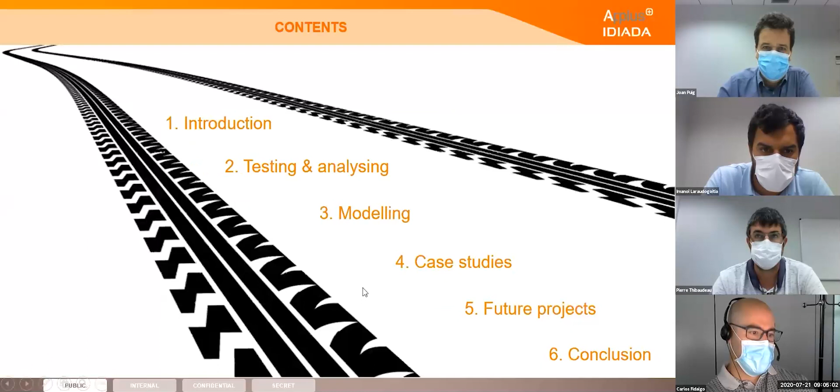At first, we would like to do a brief introduction of our company. As you may know, IDIADA is an engineering partner to the automotive industry, which provides complete solutions for product development around the world. Some of our main assets are the following: we are a team of more than 2,600 professionals with first-class state-of-the-art testing facilities, we have an international presence in more than 22 countries, and one of our strong points is the use of innovation in our services and technologies.

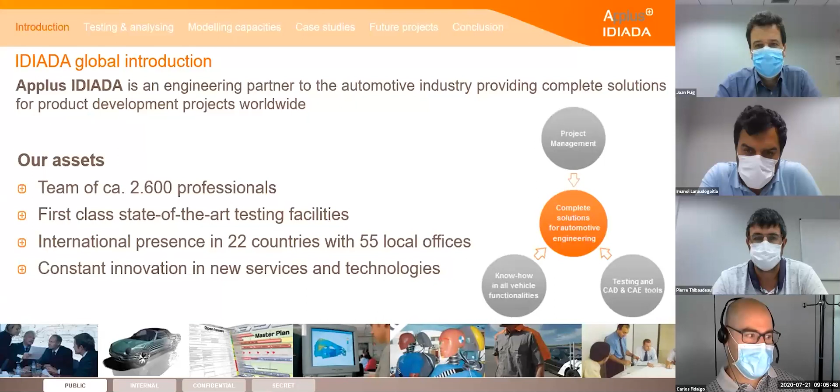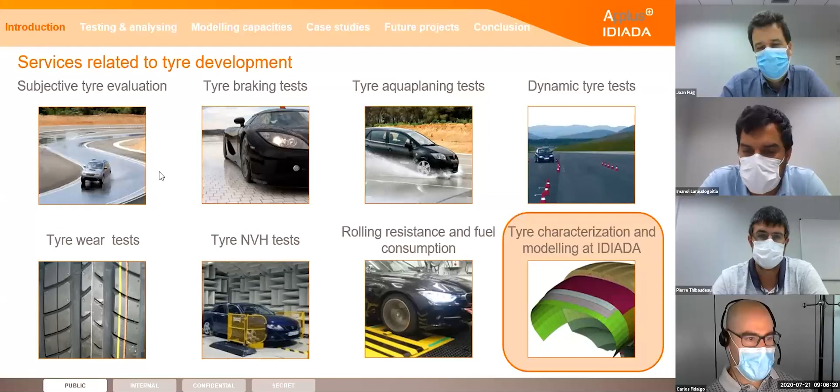In the following slide, you can see all our services related to tire development. As you can see, we have two kinds of services regarding tire. One focused on vehicle, such as subjective evaluation, braking test, aquaplaning test, dynamic test, durability test, NVH, and also rolling resistance and fuel consumption. And regarding just the component, which is what we will focus on today, we have tire characterization and modeling, which we perform in-house.

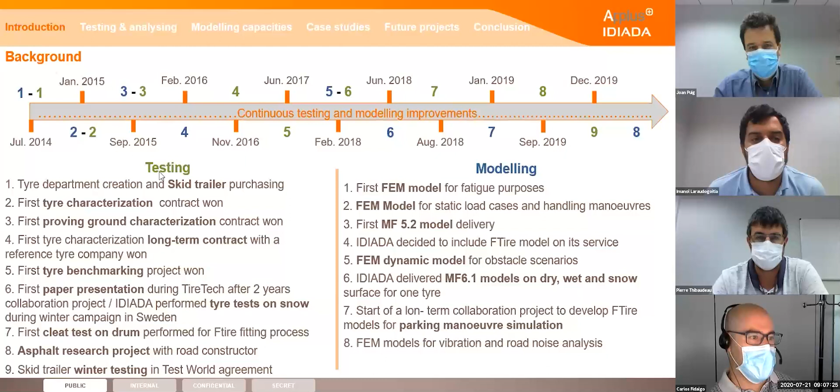In this slide, you can see our background since we started our tire product, or the evolution. Everything started with the purchase of the skid trailer. It was at this point when we decided to bet on real proving ground conditions for tire testing, because we think it's very important to test your vehicles on the same surface as you will test your component, so correlations might be easier than using laboratory testing to match your vehicle tests.

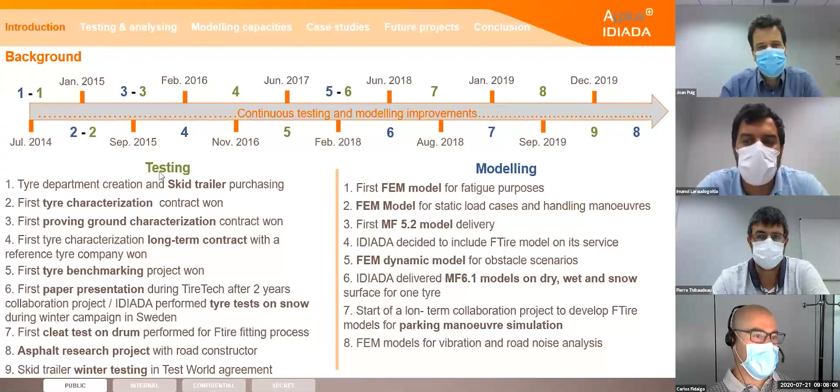From this point, we started winning different projects and developing different services until nowadays. But the most important thing of this slide is that you can see we are always improving our testing and modeling capacities every day. And now I will let you with my colleague Pierre, who will introduce our testing and analyzing capacities.

Thank you, Imanol. So as my colleague just said, IDIADA is a company which can offer you complete support during the development process for each part of a vehicle. But today we will focus on tire. In IDIADA's tire department, the first and main goal is to help our customer integrate the tire on its vehicle in the best way. For that, we are using several tools, which I will introduce now.

So the first of them is the skid trailer. This machine permits us to characterize the tire in dynamic conditions on a real proving ground. The tire is fixed to a hub at the center of the trailer and can be controlled in different ways: slip angle, camber angle, vertical load, etc., while all the forces and movements are recorded. Thanks to that, we can determine several characteristics of the tire, like the cornering stiffness, longitudinal and lateral maximum adherence.

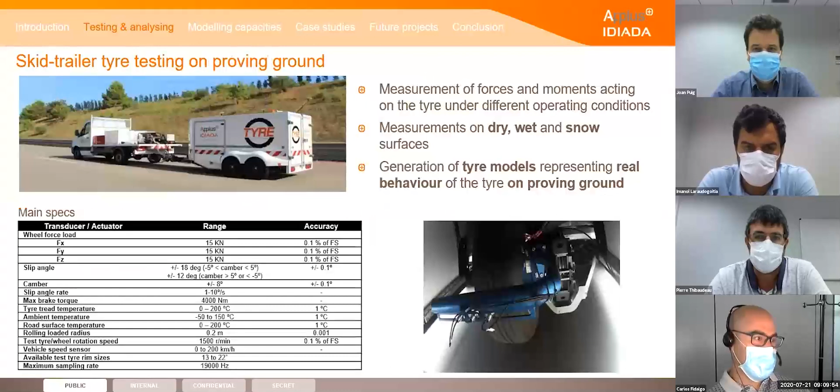One of the advantages of a trailer compared to a flat track is that we can move it to another place and perform the test wherever you want. For instance, two years ago, we made a snow campaign in Sweden to compare the characteristics of a tire on dry and wet conditions, tested at IDIADA proving ground, and on snow conditions, tested in Sweden.

The second one is the KC rig, which we have modified and adapted to use one of the platforms to test just tires. The machine allows us to characterize the tire in quasi-static conditions. The platform, shown in yellow in the picture, can be controlled on five different axes: X, Y, and Z displacement, and X and Z rotation, while the six forces and moments are recorded.

Thanks to that, we can determine the longitudinal, lateral, torsional, and vertical stiffnesses of the tire, but also perform complex tests like parking maneuvers. In this case, the surface used is 3M P120 sandpaper, but we can adapt to any specific customer requests. For instance, we are currently working internally on adapting a block of asphalt to have test conditions as real as possible.

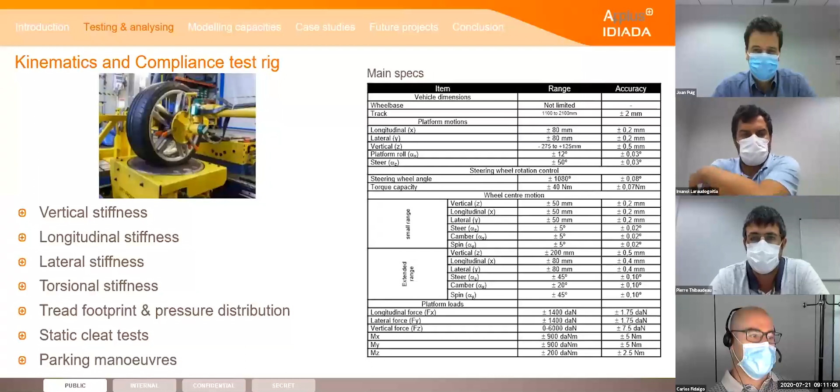Last but not least, the drum machine. As with the KC rig, we modified and adapted a drum made for rim testing in order to characterize tire frequency response. The tire rolls on a steel drum with a cleat, while the center of the rim is fixed. As with the other machine, all forces and moments are continuously recorded during the test.

Thanks to those tests, IDIADA can determine the frequency response of a tire to different excitations and different cleats. This rig allows us to make a big step forward in the modeling process, mostly for the FTire model, which is a physical model.

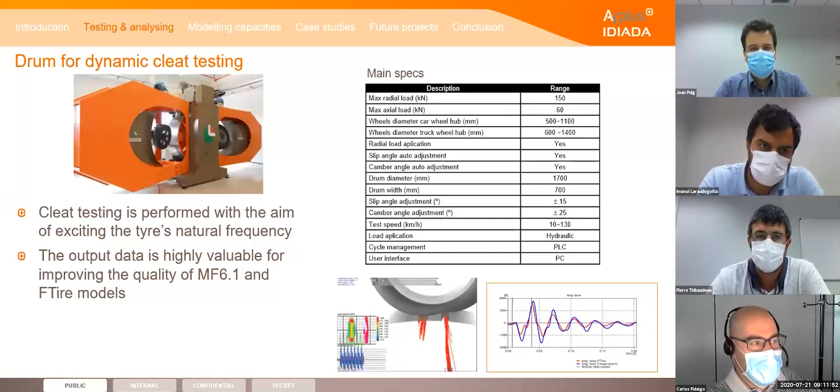In order to properly use those three rigs, IDIADA developed internally a set of test lists to characterize the tire as well as possible, considering its own temperature and wear, but also the climatic conditions. For that, each test list is adapted for each tire in order to perfectly match its behavior.

Moreover, IDIADA is open to any specific request and has the capacity to study updates to test rigs and test processes. For instance, last year a new test procedure was developed, modifying the control software on one of our rigs.

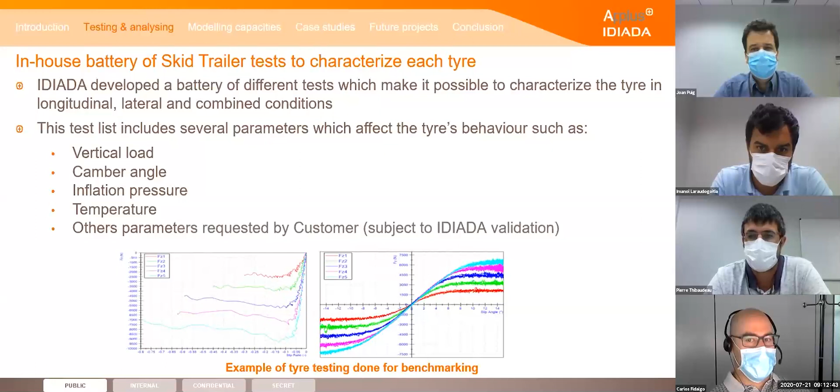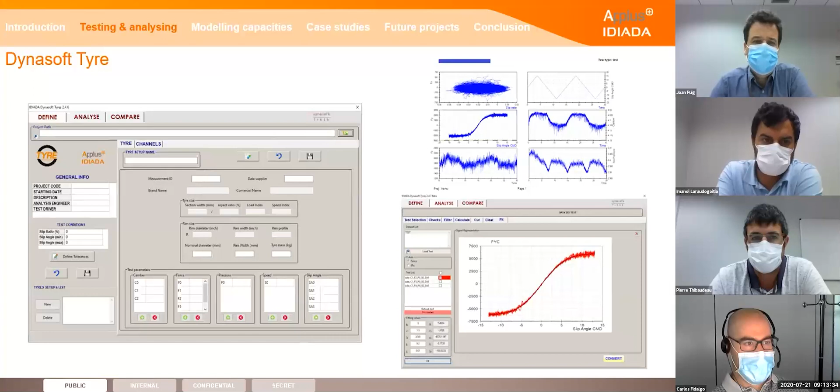But why are we performing such analysis? For example, to compare tires between them, or to reference one during a benchmarking project. For that, a set of different normalized metrics has been developed to characterize a tire in order to compare this data under controlled conditions.

These tools help customers a lot when they need to make the first choice of a tire or when they want to integrate them on their vehicle. It also helps tire manufacturers when they need to compare different prototypes to define the direction they need to follow for development.

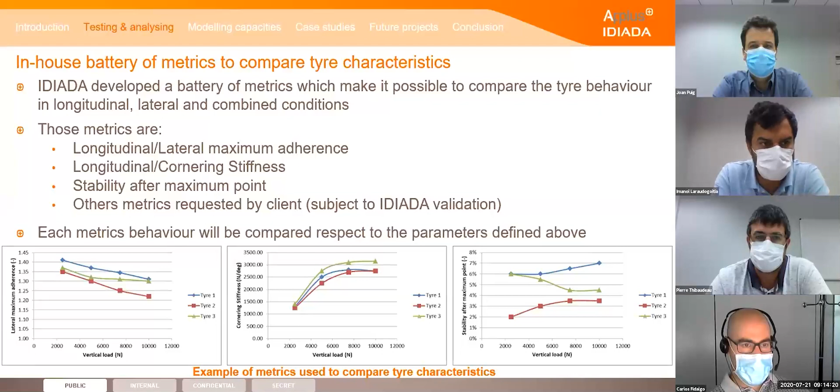So until now we've talked about tire characterization, but there is another interesting topic to deal with: proving ground characterization. As explained before, the skid trailer performs tire testing on a real proving ground. In this case, when using a reference tire, there is a possibility to characterize the proving ground by performing longitudinal tests based on different regulations.

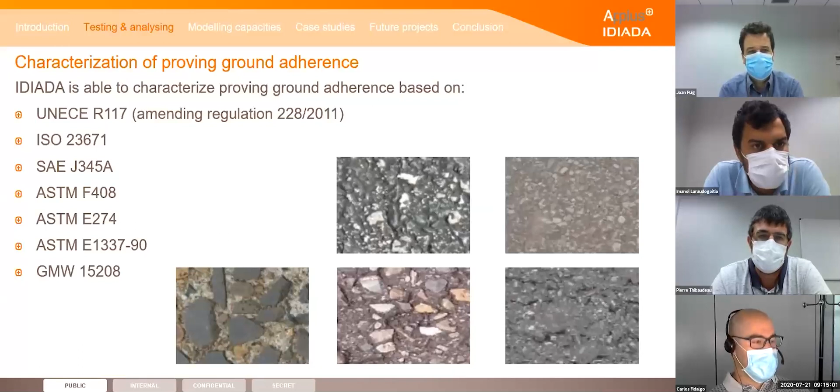As with all the other topics, IDIADA is used to working with some of these regulations, as you can see on this slide, but is open to studying new ones if the customer requests it.

To sum up a little, IDIADA has a wide range of testing and analyzing capacity, which is in a continuous improvement process based on investigation but also on customer requests. As explained in the last slide, all the tests and analysis done help the final user better understand the tire during vehicle integration or the prototype process, but that's not the only usage.

Based on all of this, models and virtual simulations can be done, and my colleagues Imanol and Carlos will explain a little more about that now.

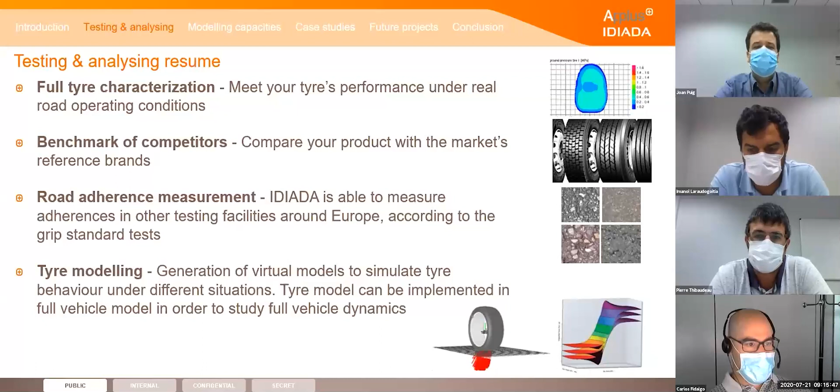As my colleague Pierre just introduced, we will go through our modeling capacities. We will start with magic formula models, which are mathematical models based on Pacejka equations. We perform different models, such as magic formula 5.2.

Magic formula 5.2 has two different use modes, use mode 4 and use mode 14, which includes the transient behavior of the tire. We are also able to build magic formula 6.1 models, which is the main model used by IDIADA.

We strongly recommend this model over the 5.2 because it has better things such as pressure behavior. This model includes 3 inflation pressures. The transient effect is also better, similar to the Swift model. And the camber description in this tire model is better than the 5.2 model.

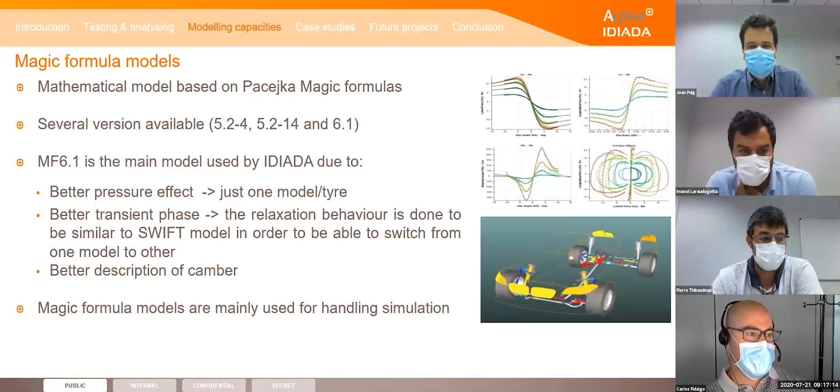All these models are mainly used in-house for handling simulations. These models are generating two different kinds of tests: tire dynamic test and tire quasi-static test.

Regarding dynamic test, we perform pure lateral test for studying lateral force and MZ torque. Regarding slip angle, we also perform pure longitudinal test, which focuses on longitudinal force versus slip ratio.

The last dynamic test we perform is a combined test, which is a mixture of lateral and longitudinal test. So while the tire is rolling with slip angle, we perform some braking tests to see how the tire is behaving in different conditions.

Regarding quasi-static test, we perform tire stiffness tests such as vertical, lateral, and longitudinal test, and we also include some footprint tests for Magic Formula 6.1 for the transient behavior.

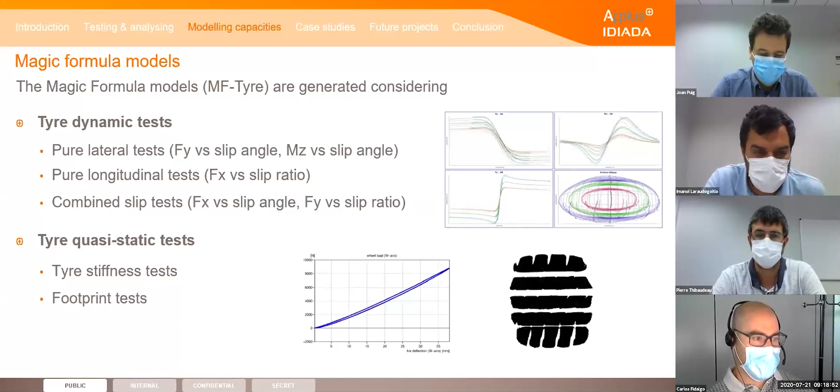In this slide, you could see how our model generation process is. As I said, we start with dynamic and quasi-static test with all this experimental data from our test. We perform the fitting of the model in order to obtain our tire model.

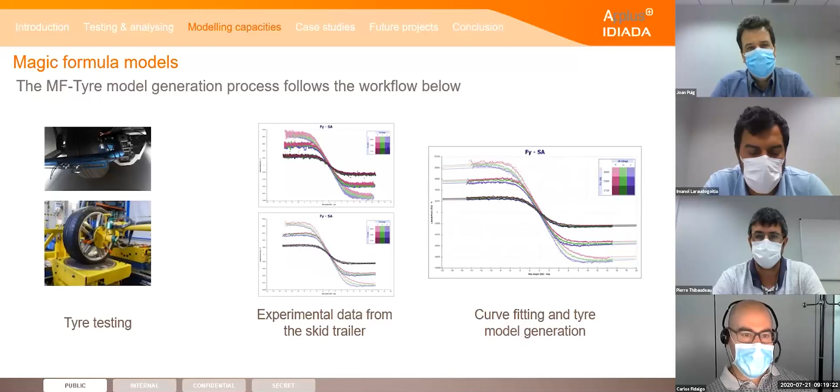As my colleague Pierre introduced, we have the possibility of building this magic formula test on different surfaces. We did a project which included dry, wet, and snow conditions for the models.

What we did is directly test on these different surfaces, because it's representative of what is happening between the surface and the tire. Using these three surfaces gives us a better fitting for using our models in car simulation.

We also have the possibility of testing in our clients' proving grounds.

What we saw during this project is the usage of scaling factors which weren't used, because, as I said, we tested on the surface the vehicle would be tested. So we used just the raw data for obtaining all these three models in different surfaces.

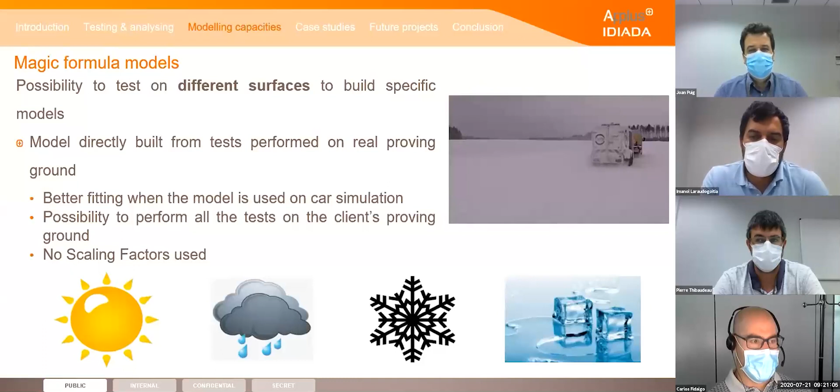The one thing to say about scaling factors is that they could be really helpful for the general behavior of the vehicle and could give you some hints on where to improve. But we saw that for testing in different surfaces, there is no rule to use the same scaling factors, because the tires are so different that it's not possible to use standard scaling factors for obtaining the behavior of different surfaces.

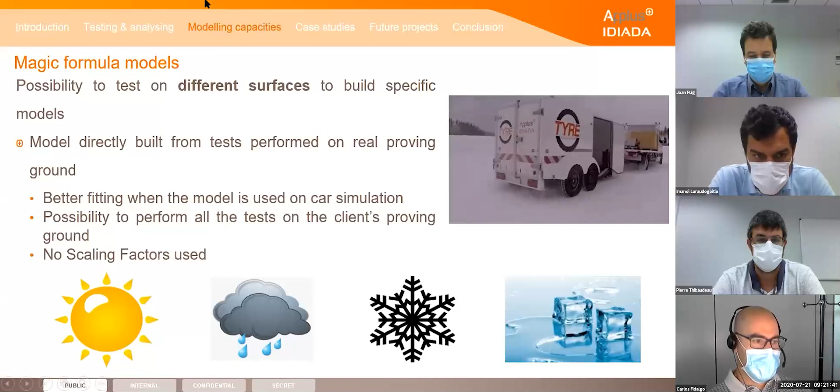Regarding Magic Formula simulations, we have an internal close collaboration with our simulation team, which gives us the possibility to validate the models with complete vehicle simulations, and also have good knowledge of several simulation softwares, so we can adapt our model to every one of all the softwares there are.

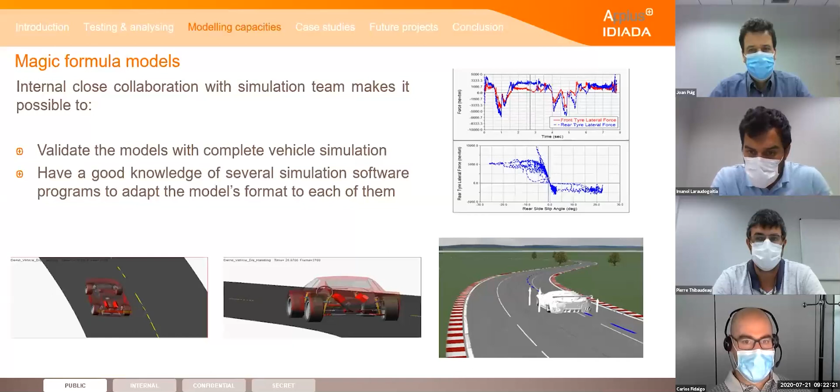Now we would go through our physical modeling, which includes FTire modeling.

For determining the tyre characteristics of this physical model, we start by doing some footprint tests in static conditions, as well as static measurements, such as tire stiffness and basic tire properties.

Then we also include some handling tests that are performed in our proving ground with our skid trailer. And we normally include pure lateral and pure longitudinal tests.

And for determining the frequency response of our tire, we perform some cleat tests in our drum machine, rolling the tire over a cleat in order to determine this frequency response.

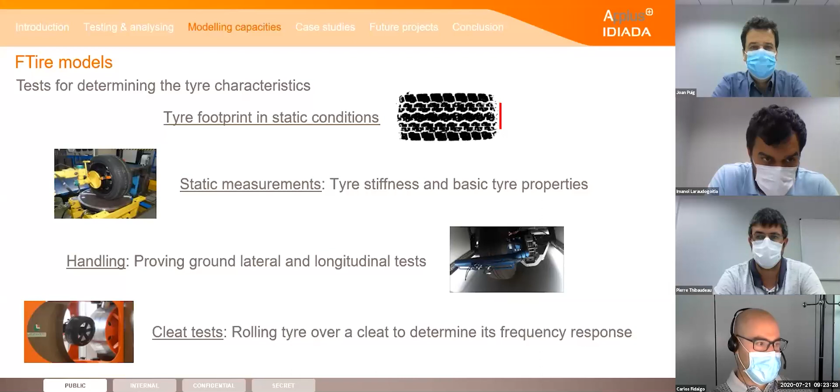Here we have some specifications of the FTire models. The FTire model is a physical model which is available for using it in real time. It is able to simulate up to 250 Hertz.

This model has a better behavior in terms of comfort simulation, and it also offers us the possibility of simulating thermal behavior.

These models have extra capacities in vehicle handling simulations, as well as tire durability simulations.

One of the strong points of this model is ride and comfort simulations, which offers us the possibility of simulating on unstable surfaces. It also gives us the possibility of using any virtual proving ground, including our proving ground in Spain. And as I said in the beginning, it also gives us the possibility of performing some real-time simulations.

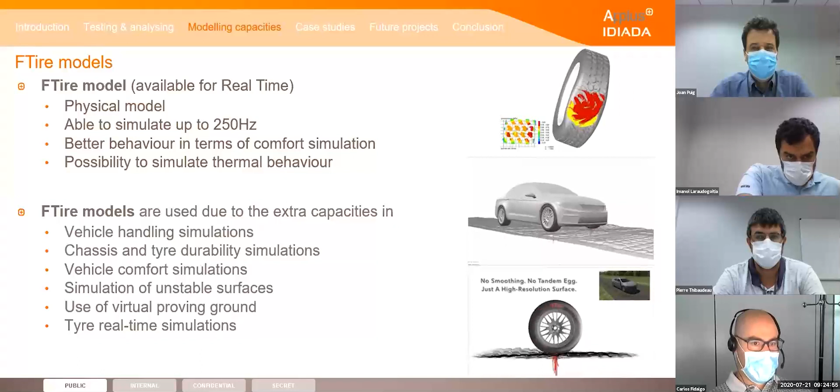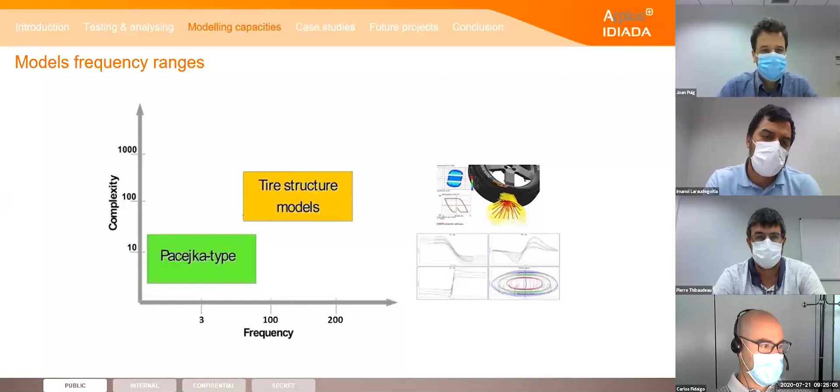So regarding the model frequency ranges, for the moment we explained two different tire models. If we would like to test in low frequency, we will use Pacejka tire models. If we would like to go up to 250 Hertz, we will go to tire structure models such as FTire.

And if we are interested in going to higher frequency ranges, we would use our finite element models, which my colleague Carlos will go through and explain. Thank you very much, Imanol.

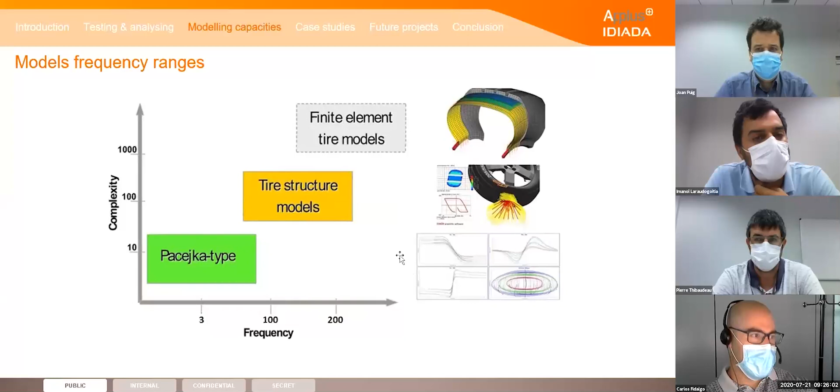Finite element analysis models of a tire are key for understanding the different performances of the component. As we know, the tire in service withstands many uncertain loads, like rim mounting, inflation pressure, vehicle weight, sometimes crash impacts, or running over obstacles. This uncertainty, together with a very complex composite structure composed of 14 or 15 rubbers, nylon plies, steel cords and beads, makes building a tire model a very complex task.

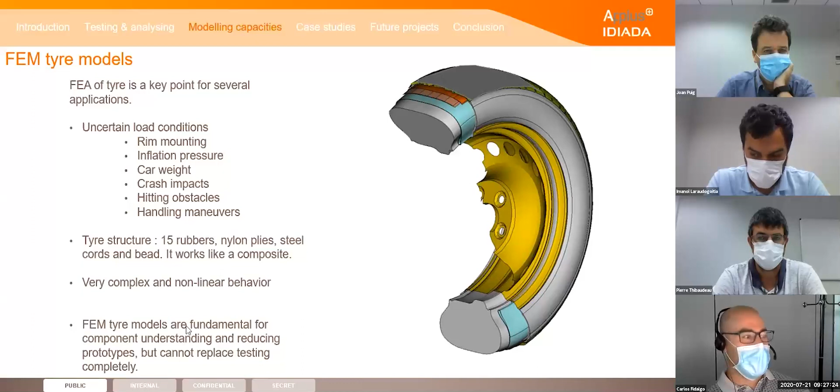Even with this level of complexity, and the fact that actual methodologies sometimes will not reach in a quantitative way the exact behavior of the tire, we believe a good tire FE model is necessary for a proper understanding of the tire. Studies performed with these models reduce the number of prototypes that don't match requirements for good performance, avoiding manufacturing many of them and saving a lot of money. But of course, testing cannot be replaced.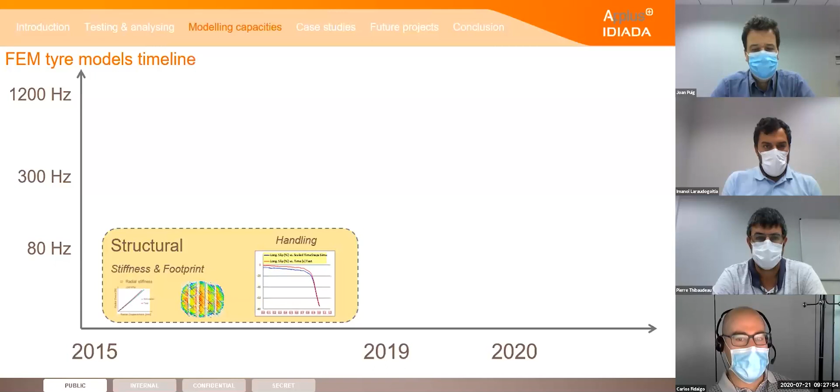These are the reasons why in 2015, through internal research projects, we developed a series of tyre models which cover a wide spectrum of tyre performances. The first models we worked on, which are the base of the rest, are the structural models, with which it is possible to calculate the static behavior of the tyre, stiffness in the 3 directions, and also perform handling maneuvers including braking, acceleration, cornering, and their combination.

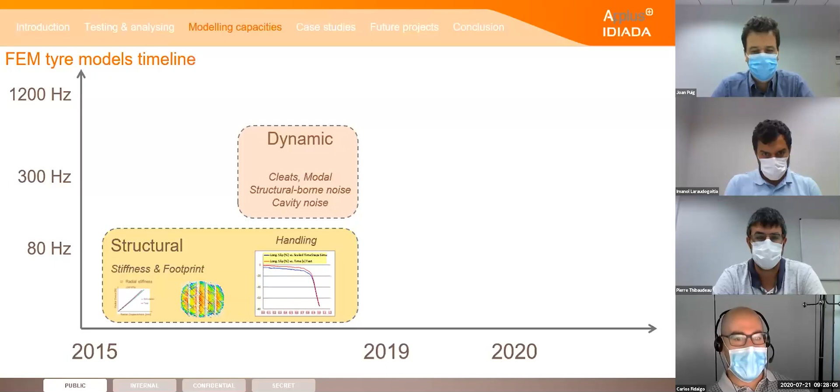The second group would be the dynamic models for calculating modal and frequency responses, and for example the response of the rolling tyre over an obstacle. For vehicle development, and to integrate the tyre models within the whole vehicle model, simplified tyres based on dynamic advanced tyre models are used. The main objectives here are body-in-white comfort, durability, and rolling noise calculations. Also tyre dynamics for abuse and crash load cases can be calculated.

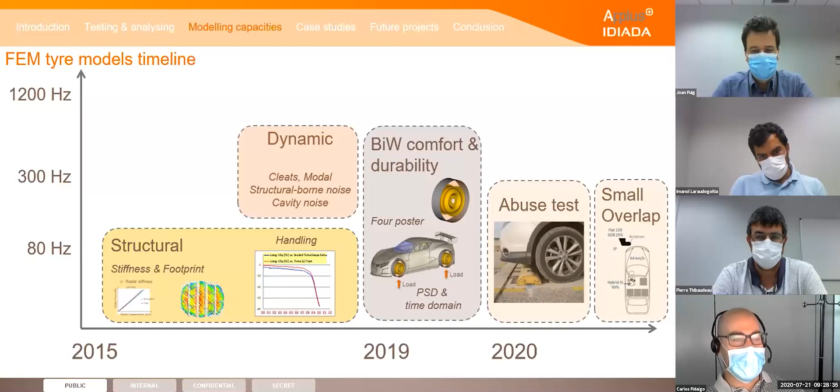A special case would be, for example, a small overlap crash test, where the tyre behavior is key for understanding intrusions, or for performing intrusion studies in the firewall and A-pillar. And of course, for electrical vehicles, tyre noise is the biggest contribution for a wide range of service velocities. So it's important to know the relation between tyre structures and radiated noise, and how the radiated noise is perceived by passengers and pedestrians. Noise propagation models help with this task.

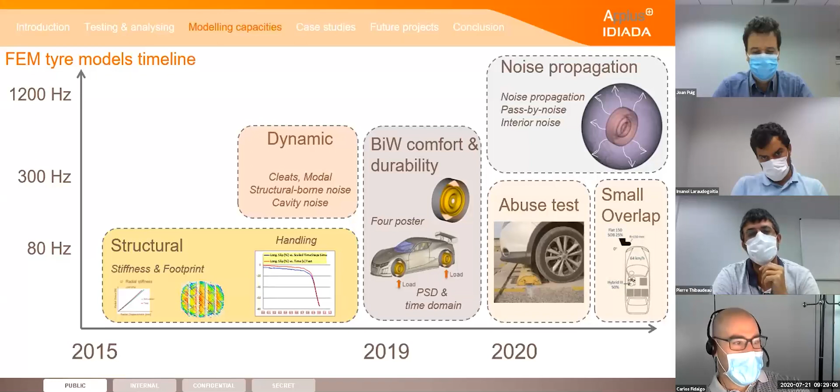As an example of all these models, I will show the dynamic model for obstacle scenarios. In 2017, we had the experience of comparing one tyre dynamic model with the tyre rolling in the drum of the Leonardo machine at different speeds, vertical loads, and inflation pressures.

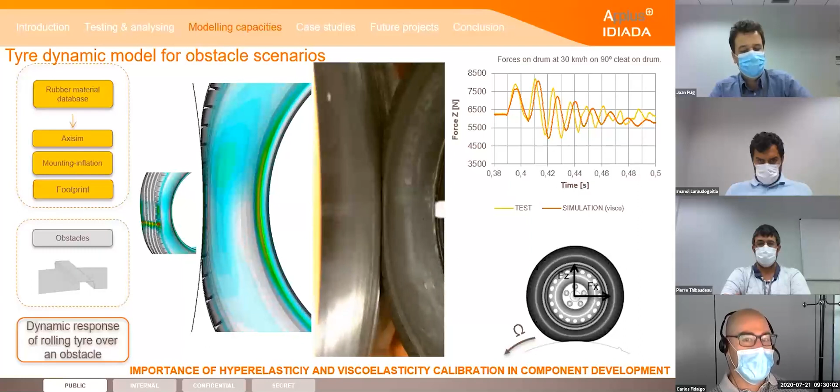Free rolling was tested, but we also ran the tyre over obstacles, like you see here in the videos, over one cleat. As you can see on the right side, the frequency response in the 3 directions correlated quite well, but there are still some differences in amplitude and frequency in the response. This response is affected mainly by the material rubber characteristics. So performing a proper rubber material model in terms of hyperelasticity and viscoelasticity is our main objective if we want to have a ready model for inclusion in a tyre development process.

This leads us to the question: what do we need to calibrate the rubber material properly? And the answer is to know the modes of deformation of the rubber.

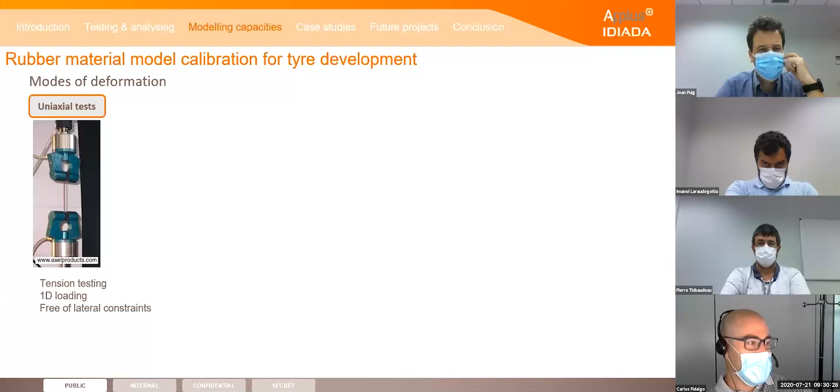In the 30s, it was thought that only with a uniaxial test the rubber behavior could be completely described. But what do you think? Was it correct? Does it fit the rubber behavior? Many of you have thought that no, it is not correct, it is not enough. And this is the answer: it is not enough.

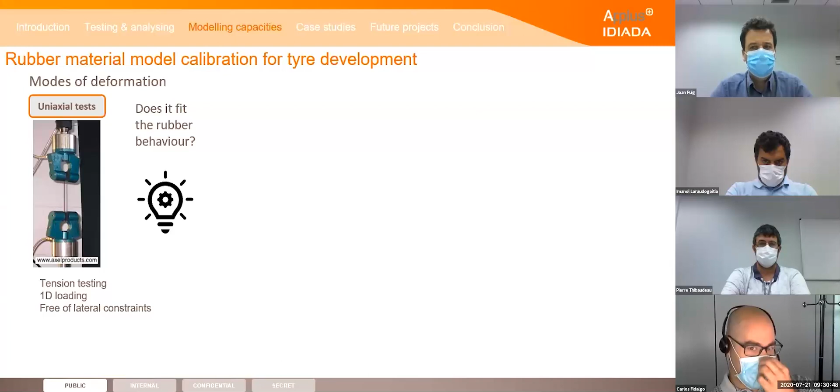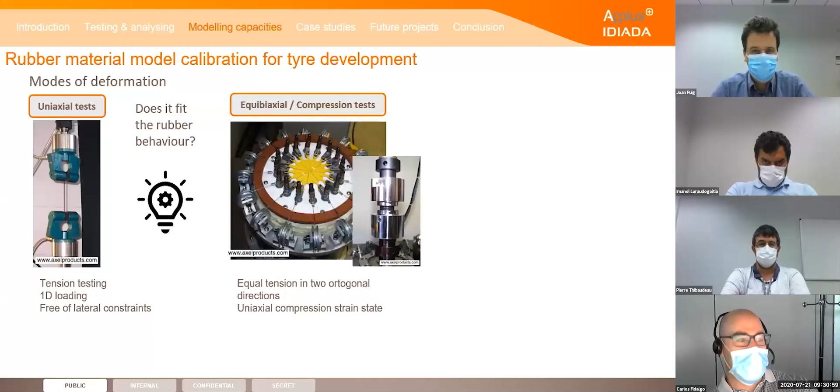Rubbers are anisotropic materials, meaning they have different responses according to the direction of the applied forces on the specimen. This is why some other tests are needed to completely define the rubber behavior. These tests are the equibiaxial or compression test for uniaxial compression strain state characterization, and the planar tension test for the pure shear deformation mode. So at the end, the objective is to perform several tests virtually and fit them with experimental curves using an advanced material model.

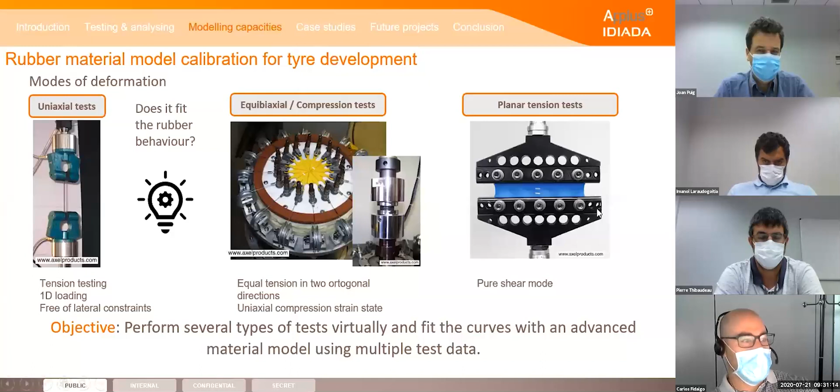In addition to this phenomenon, we know that simple, equibiaxial, and planar tension tests deliver different curves. So for an advanced rubber material model, all these phenomena at different strain levels for each of the modes of deformation should be fit.

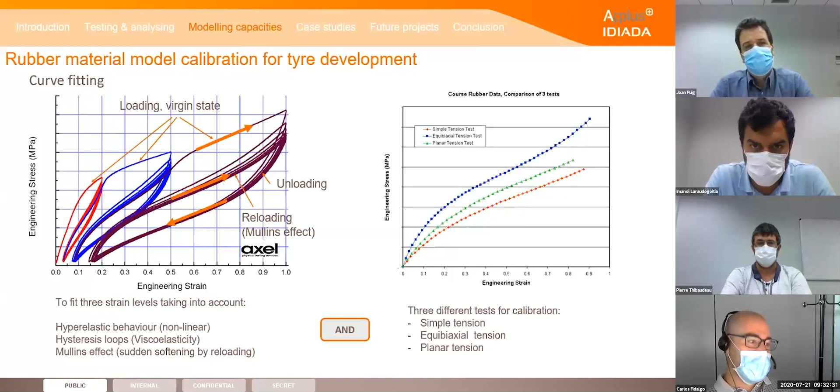For defining the material model.

For a material model definition, the basis of the calibration will be the hyperelastic model for large strains, calibrated based on the virgin response. Several models exist to define this nonlinear behavior, like for example Yeoh or Neo-Hookean.

Then we can add the viscoelasticity behavior, time or frequency dependent, based on relaxation tests. The viscoelasticity definition can be linear through Prony series, for example, or nonlinear and temperature dependent with parallel rheological models. Also, the Mullins effect can be captured using the Ogden-Roxburgh model, which includes hysteresis behavior.

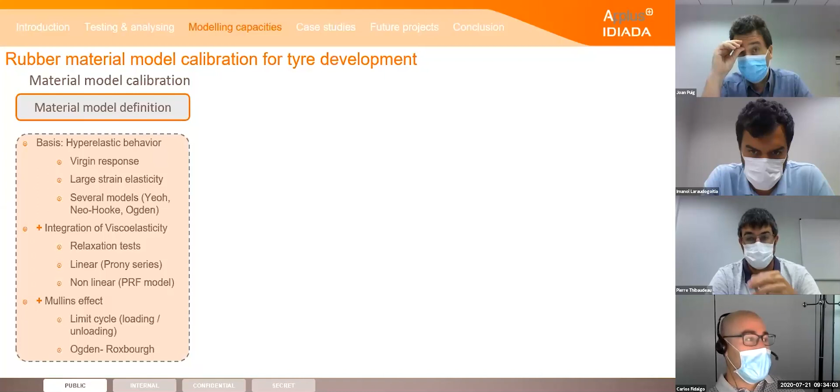The integration of all these phenomena leads to a wide amount of model factors to be calibrated, and some of them don't have a very big effect on the response. So it is not easy to deal with a big amount of factors when performing, for example, sensitivity analysis, which is the main goal here.

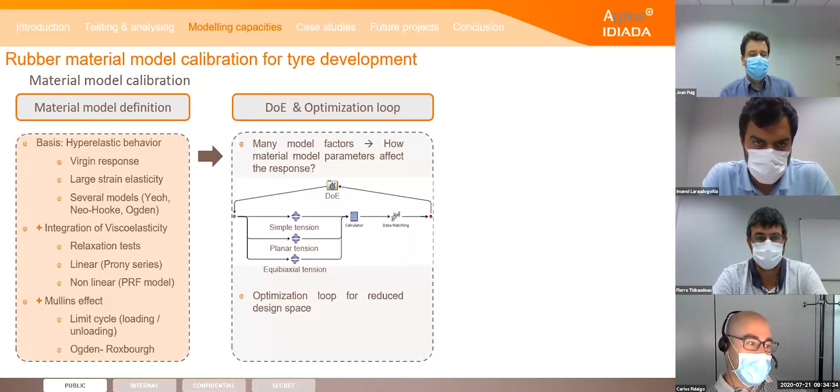Through a preliminary DOE, key factors for the rubber response can be discerned. After that, a second optimization loop can be performed, maintaining constant the factors which don't have a big effect on results.

So this was for tyre development, but tyre behavior importance is because of its symbiosis with the vehicle. The tyre must be included in the complete vehicle development process, and here the approximation changes.

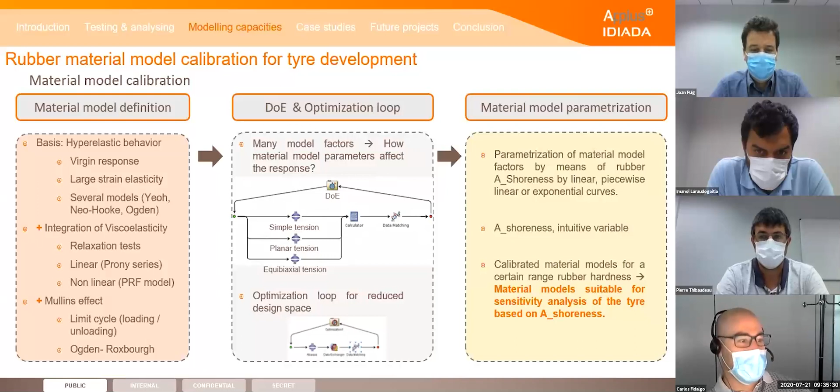In the vehicle development process for performances like comfort, fatigue, or rolling noise, there is sometimes a lack of information regarding rubber material properties, due to tyre industry opacity or maybe because of the high cost associated with rubber material tests.

In this case, the approximation to have a good correlated model changes, and we use a finite element model, a simplified dynamic model, for this task. These models are directly correlated using the results of the component test.

Until now, this presentation was focused on the capabilities, but a very interesting part for you also is the experience and case studies we have gathered by applying this knowledge directly in the real development process. These case studies will be shown in the next slides.

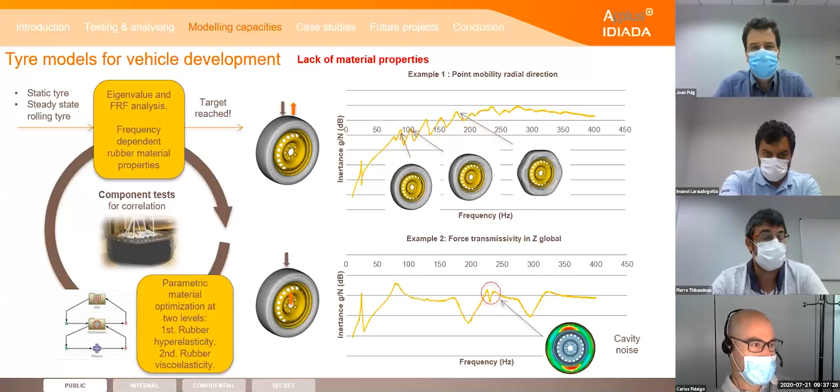Okay, thank you, Carlos, for your explanation.

So, as you say, a very important thing in this presentation are the case studies, so some experiences we have here in IDIADA.

As explained before, the tests we are performing here help the customer to integrate the tire on their vehicle. One application is the selection of tires for braking performance of a vehicle. The customer can give us a set of different tires to compare on longitudinal conditions, on dry, wet, or both. With those measurements, theoretical stopping distance based on tire maximum longitudinal adherence and vehicle characteristics is calculated. With this data, a classification from the best to the worst on each condition is defined, which helps the customer understand better the performance of each tire for the specific test condition.

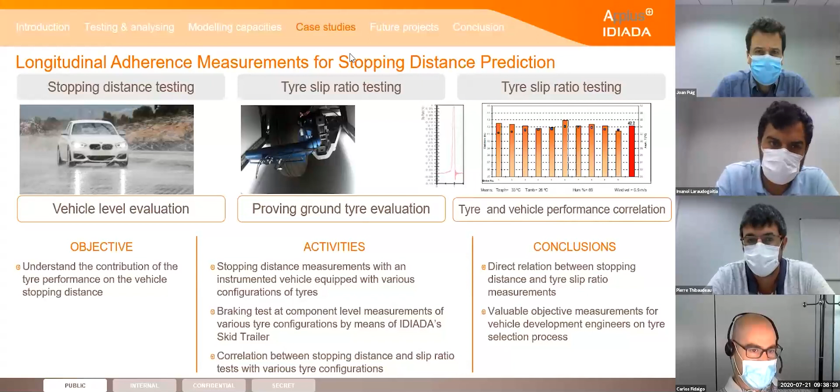Another experience we had in the past was a high fidelity comfort assessment in our new driving simulator. By means of generating an MBS model and including an F-tyre in real time, the main objective was the prediction during vehicle development phase of ride and comfort performance. We used an MBS model and an F-tyre in real time, and also included the usage of our virtual proving ground, integrating everything in our driving simulator. The main objective was to obtain, throughout our simulations, the same human feeling as the driver would have in real conditions. Due to our high fidelity MBS model and F-tyre model, we could draw good conclusions on the ride and comfort behavior of the vehicle and tires. This technology also permits driving evaluations during vehicle development while the vehicle is not yet constructed.

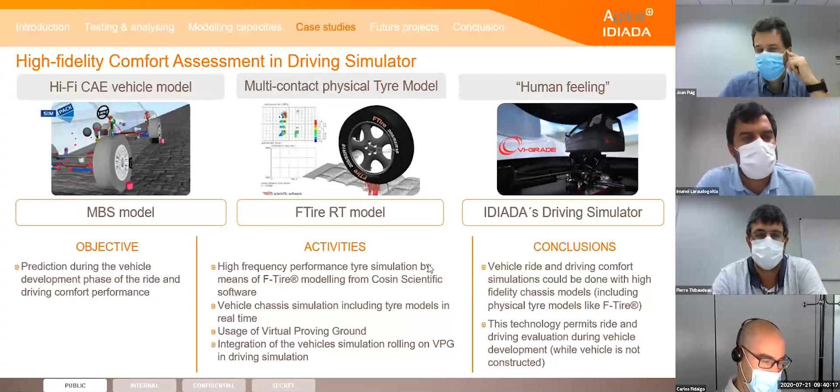Another important experience we had was developing an endurance test mode for a high performance tire. The starting point was testing a sports car on a circuit, and the main objective was to translate all the inputs that the tire suffered during circuit handling to a laboratory testing methodology.

We ran on a circuit with the sports car. Once we had the inputs on the vehicle, we did a complete vehicle characterization, including K&C test, moments of inertia, aerodynamics, and powertrain. Components were also characterized, such as brakes, suspensions, and tires. We included a magic formula model from which we could extract and calculate all the tire inputs occurring in the circuit, and with all these inputs we could translate it into a laboratory durability test method.

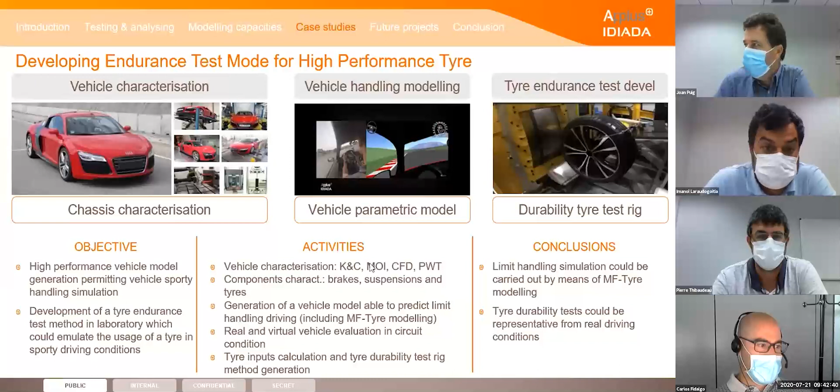In this case, the idea was to perform a sensitivity analysis of the tire structure, involving the rubber section and the nylon plies for the three stiffnesses of the tire. The variables selected were the rubber Shore A hardness of the tire section and nylon cap plies stress-strain curves, and the study was performed with help of a design of experiments. The results obtained show how the carcass and other sections of the tire influence each of the stiffnesses respectively.

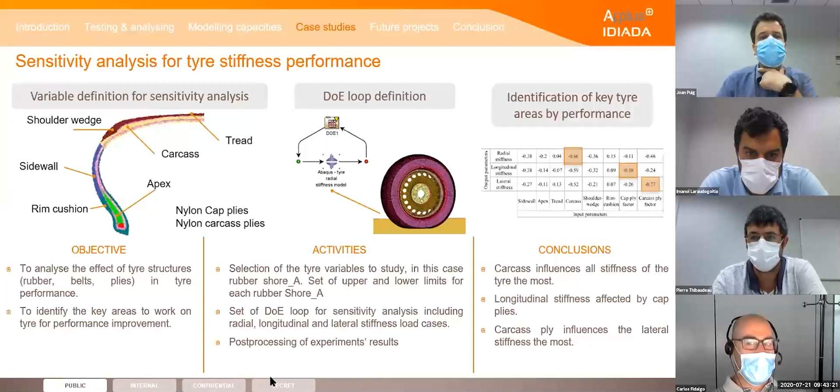So next slide, Emmanuel, please.

The next case study was the correlation of a model for fatigue and noise prediction purposes. The objective was to correlate the tire dynamic response until 300 Hertz by means of modal testing. The model was simplified using connector elements, and after the optimization loop up to 250-300 Hertz, the simulation results matched the test results well, so the model was ready to be included in the whole vehicle model. We also obtained a lot of information about the influence of each tire section on the tire mode shapes and frequency.

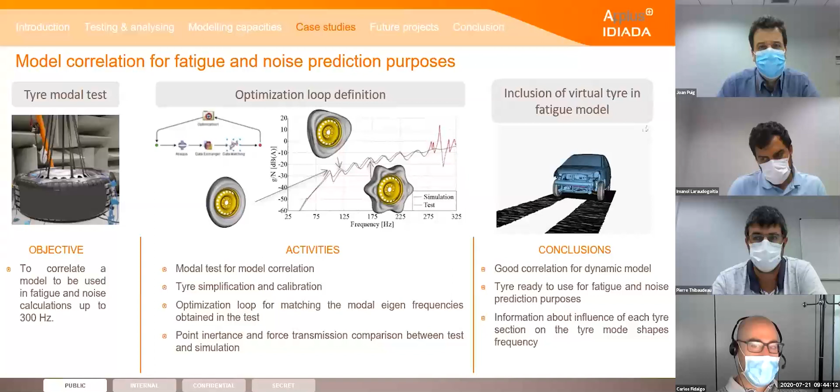So, Emmanuel, please.

The last case study is an ongoing project of our PhD research engineer Bharath Anantharamaiah, with the main goal of developing a powerful numerical tool that facilitates the prediction, propagation, and perception of tire noise. For this, Bharath is performing modal, acoustic, and static tests for tire performance understanding, and is also developing a virtual tire for noise prediction and a methodology for psychoacoustics and annoyance evaluation. A subjective evaluation for synthesized noise can also be done, as well as studies on how changes in tire structure affect the synthesized noise. This is, for example, a synthetically created noise.

Okay, this was synthesized noise.

And now we will present some testing and modeling topics that we are working on right now. So we can continue, if you want, Emmanuel.

Okay, this is just an example.

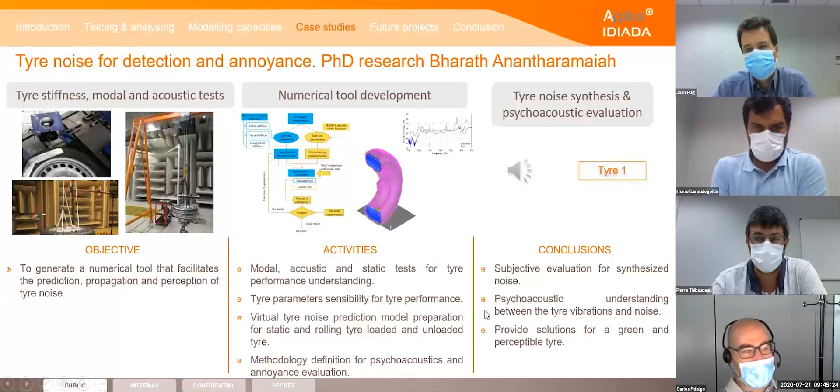We will present now some testing and modeling topics we are working on right now. As explained, tire development needs a continuous improvement process since it's a very complex product. Some projects are ongoing to permit a better understanding of the tire, like the integration of a tire 3D scanner or moment of inertia test rig in our process to have more information about the tire and better data for the models.

We are also working on the integration of the block of asphalt on our K&C test rig to have the same conditions as on the proving ground for quasi-static tests, as well as the integration of a rigid rim on F-tire models. For that, we are working on implementing a very rigid rim in our test process and on the characterization of this rim.

And the last project is the development of a tire stiffness rig, which can permit us to have better and more results than we have now.

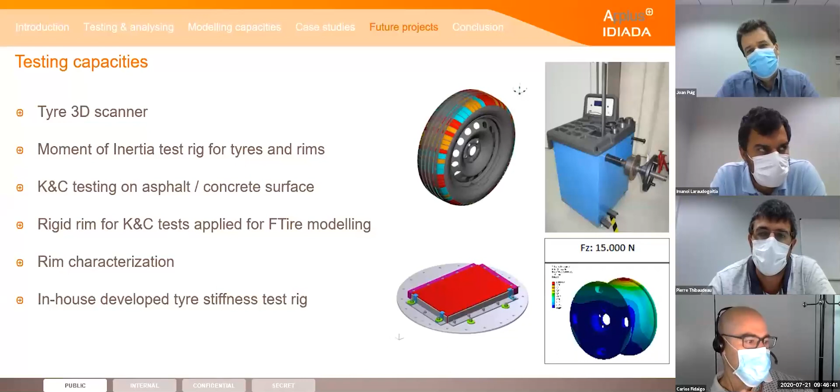Regarding our future modeling capacities, we are studying the possibility of including new models in our products, such as Magic Formula 6.2 or Swift, also CDTire. We are also studying the integration of a flexible rim in F-tire, and we are developing some tools for noise prediction through FEM or BEM methods.

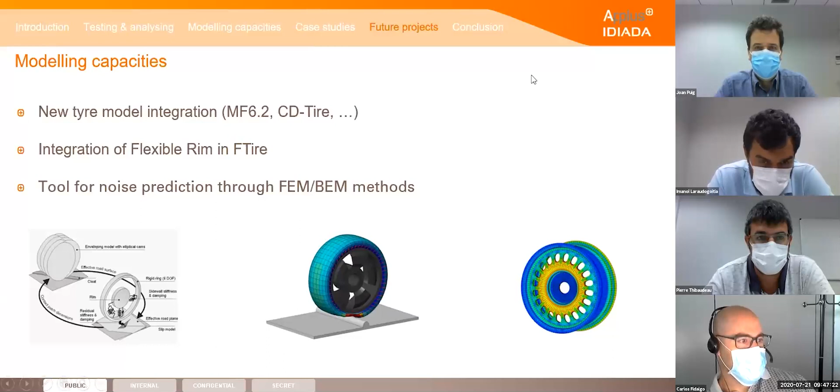As a wrap-up, to point out our conditions: all our in-house testing and modeling is done in real proving ground conditions. Also, our complete test catalog covers Magic Formula, FTire and FEM models. And last but not least, we would like to point out our adaptability to our clients' needs. We also offer support to our clients during the tyre or vehicle correlation phase, and we always like to have a close partnership with each of our customers.

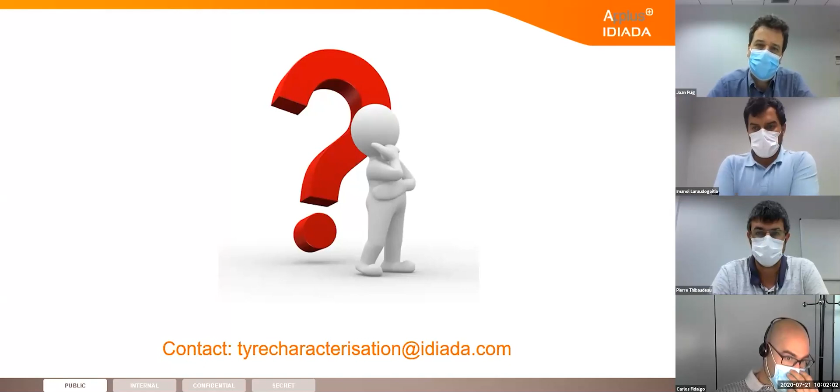Here comes one question. Is there any apparatus which could measure the side slip of each tyre in real life, or does it still have to be derived from other vehicle dynamics parameters? I guess this question is about whether we can register the slip angle in vehicle conditions. From our side, we are not testing the tire on a vehicle, because we are testing the tire as a component, not as a part of the vehicle. But using, for example, a Correvit system, I think you can mount it directly on the wheel and get the direct slip angle of the tire. So I think it's possible.

Yeah, so basically what we are naming stability after peak slip angle is to compare different tires, so it's not a very quantitative metric, but more for comparison. We are talking about how much force the tire is losing in lateral behavior, in this case after the peak, the maximum peak of forces. So we define a maximum slip angle, and we measure how much force is lost from the maximum to that point, and we compare the different types.